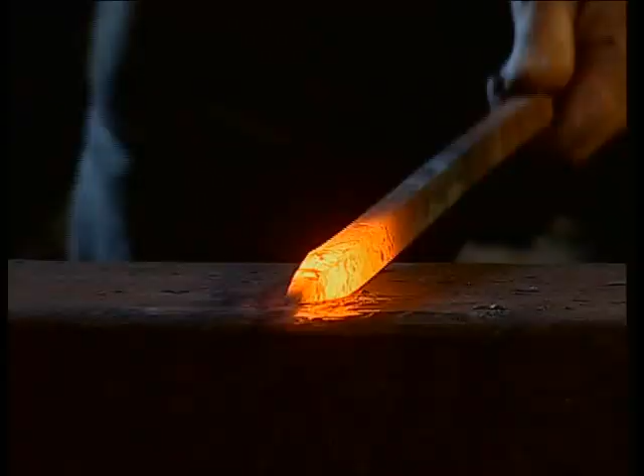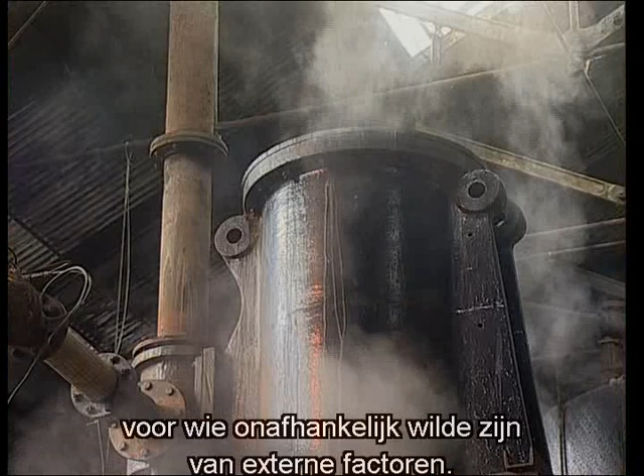For centuries, whenever work had to be done, man was dependent on sheer muscle power. Later, with the help of water wheels and windmills, he was able to utilise the power of the elements, but only to a limited extent. It was not until the early 18th century that a new solution presented itself to those who wished to be independent of the weather and geographical factors. That solution was the steam engine.

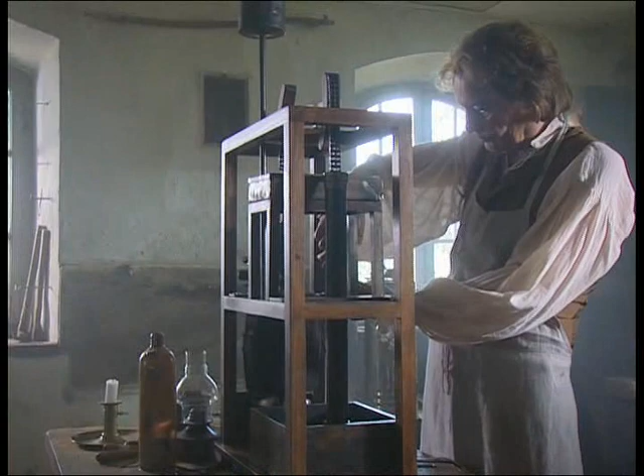One name stands for its success story, that of James Watt. This Scottish engineer didn't invent the steam engine, but he vastly improved the original concept.

In 1775, Watt and his partner, Matthew Boulton, set up a factory in Soho, today a part of Birmingham, which manufactured modern steam engines for delivery to industrial centres all over Europe.

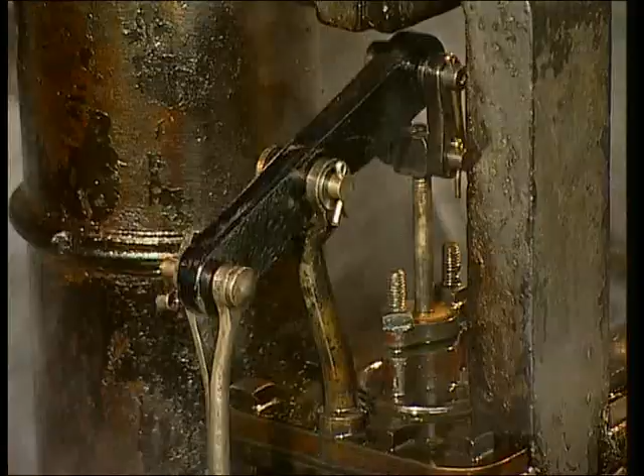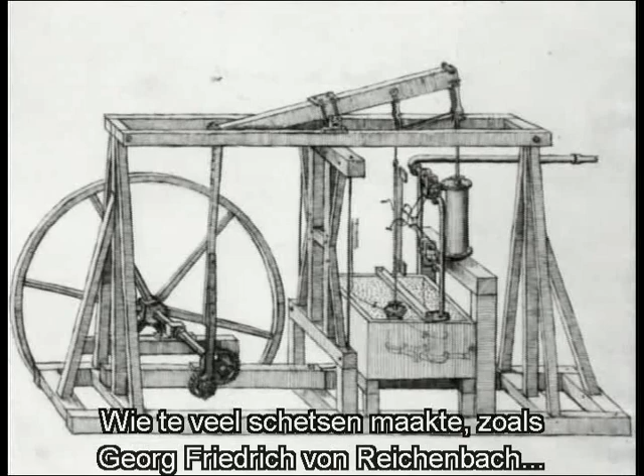Visitors asked Watt himself about all the latest technical developments, but he wouldn't reveal any details. Indeed, he kept his knowledge a closely guarded secret. Any visitor who made too many sketches, like German engineer Georg Friedrich von Reichenbach, was seen as a spy and quickly shown the door. Watt had acquired his expertise at great effort over many years.

James Watt was born in Greenock, near Glasgow, in 1736. His father was a ship's chandler who had his own small workshop. From time to time, he also repaired nautical instruments. James spent a lot of time in his father's workshop, watching him at work.

At the age of 18, he started an apprenticeship as a precision engineer in Glasgow, which he completed in London. James learned how to manufacture scientific instruments, and in doing so, provided proof of his talents.

In 1756, Watt returned to Glasgow. Since the length of his training did not meet the requirements of the craftsmen's guilds, he was not permitted to set up his own workshop.

However, Glasgow University required his services. And in 1757, it allowed him to open up a small instrument-making business on its premises. This was a real stroke of good fortune for Watt, since staff at the university imparted modern technical knowledge and engaged in research.

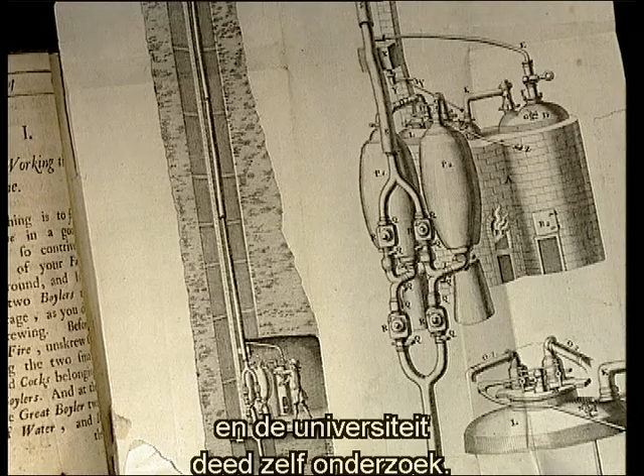Its scientists were particularly interested in the steam engine. It enabled heat to be converted into mechanical energy.

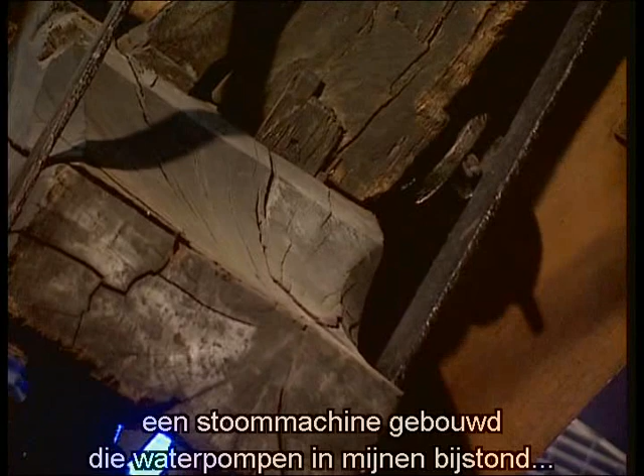In 1712, a blacksmith and inventor called Thomas Newcomen had built a practical steam engine. It was designed to improve the efficiency of water pumps in mines so that galleries could be driven further underground.

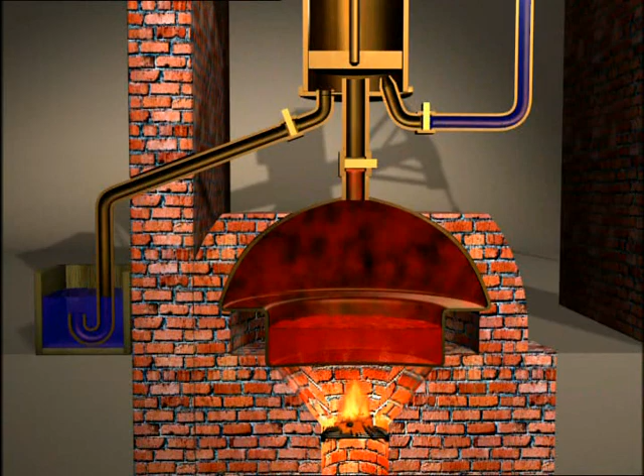With Newcomen's invention, water is made to vaporise in a boiler. The steam is fed into a cylinder. The pressure from the steam and the weight of the pump rods on the other side of the beam slowly force a piston in the cylinder upwards.

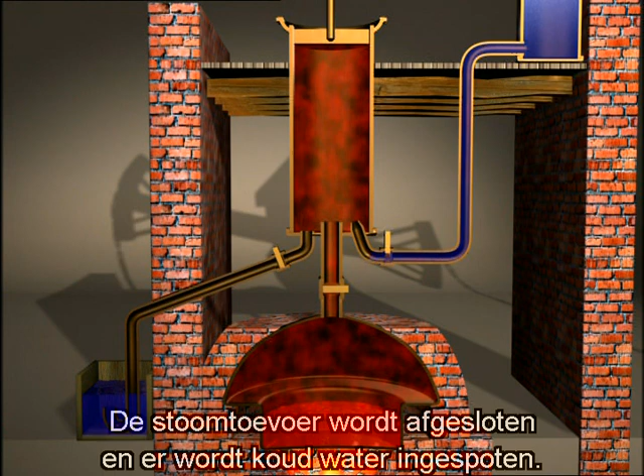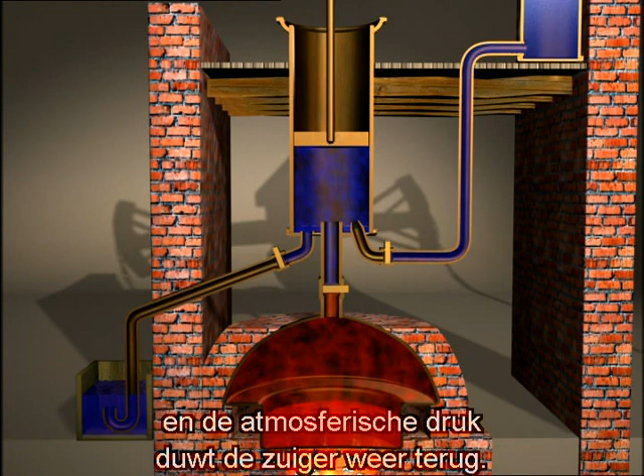The steam supply is now cut off and cold water sprayed into the cylinder. The steam condenses and its volume decreases abruptly. This creates negative pressure in the cylinder and, because of the atmospheric pressure acting from above, the piston moves back down into its original position. The water that is collected in the cylinder is drawn off and the process starts again.

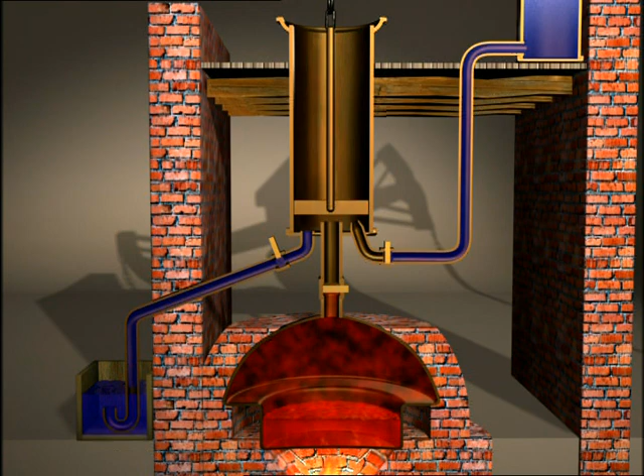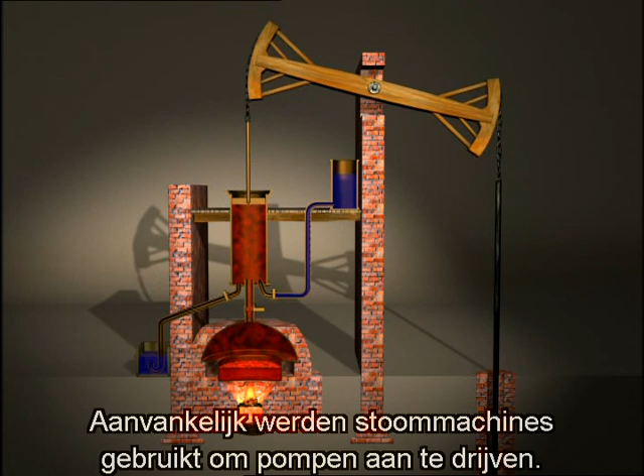For many years, steam engines were used primarily for operating pumps. Newcomen's success was also revealed by the fact that a model of his machine was used at Glasgow University for explaining how steam engines worked.

But the model didn't always function as well as intended. When it came to an unexpected stop yet again, it ended up on Watt's workbench for repair.

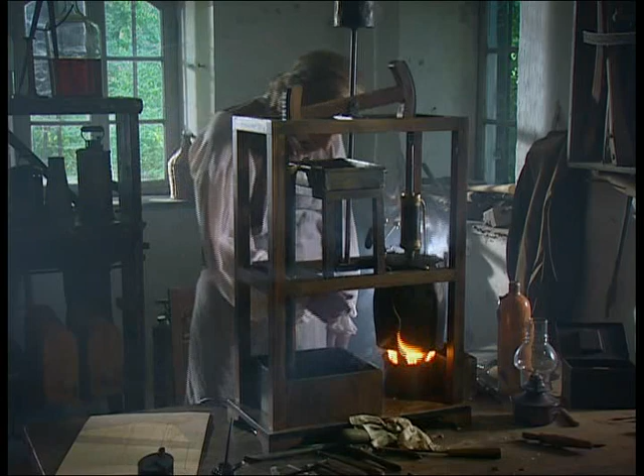James Watt began to examine a machine that was totally new to him. He discovered that the principle was not very economical, because when the cylinder fills with steam, it gets very hot, and when condensation takes place, the cylinder cools down considerably.

With each working cycle, the cylinder first has to be heated up again, so a large amount of the steam supply is wasted.

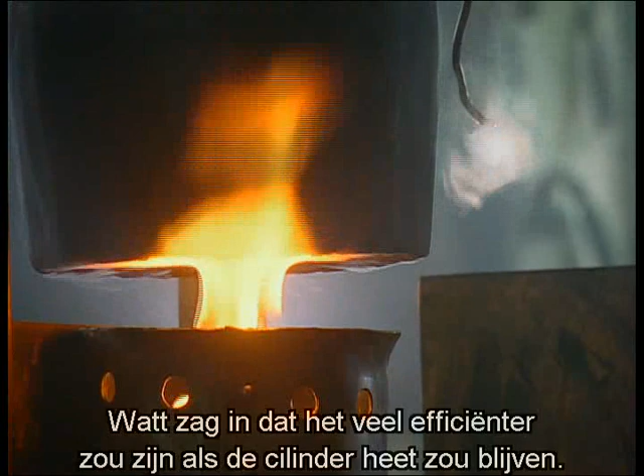Is it really necessary, Watt thought, for the cylinder to cool again? Surely leaving it hot would be much more efficient, but in that case, how could the steam be condensed? Watt then had the brilliant idea of using two separate cylinders.

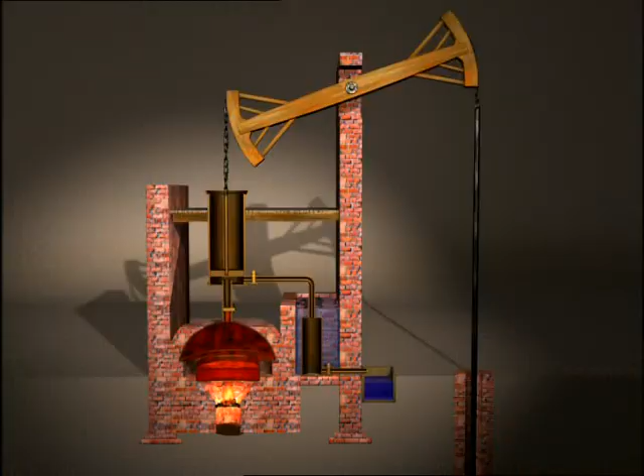At the start of his process, the piston is at the bottom of the cylinder. When steam is introduced under the piston, this subjects it to pressure. As with Newcomen's machine, the pressure from the steam and the weight of the pump rods force the piston upwards.

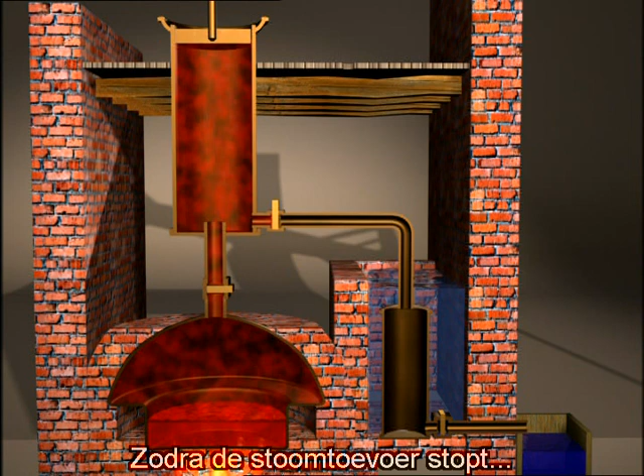Now the steam supply is cut off and a pipe leading into the second cylinder, the condenser, is opened. In this case too, the cooling of the steam creates negative pressure, which, together with the atmospheric pressure, forces the piston back down.

The pipe connecting the cylinder with the condenser is then closed off again and the steam valve opened. The process can now be repeated without the steam cylinder having to cool down.

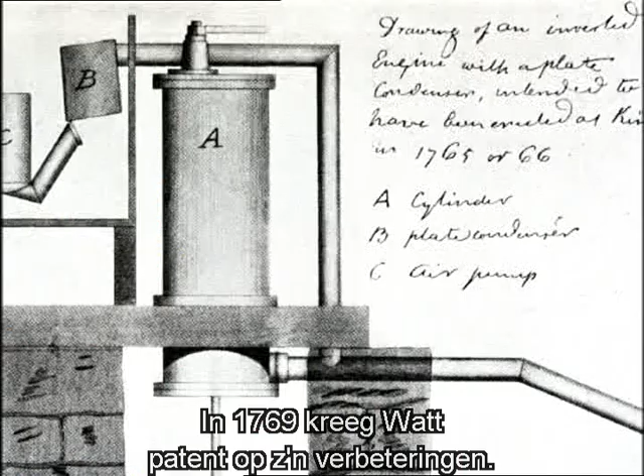In 1769, Watt had his improvements patented, but in order to build a practical steam engine, he needed a lot of money. He found a financier in John Roebuck, a mine owner. In return for his support, Roebuck claimed a 2/3 share in Watt's patent.

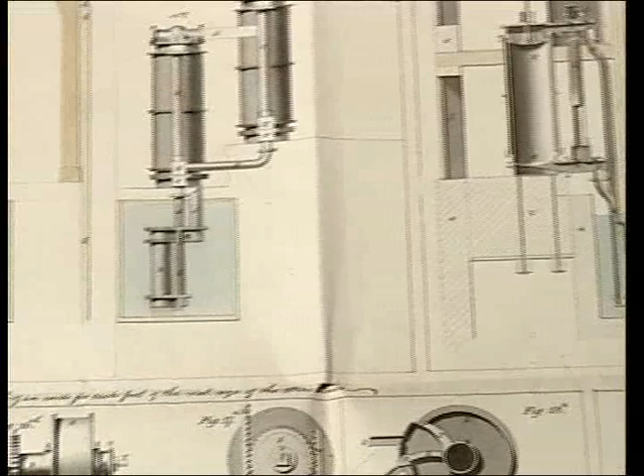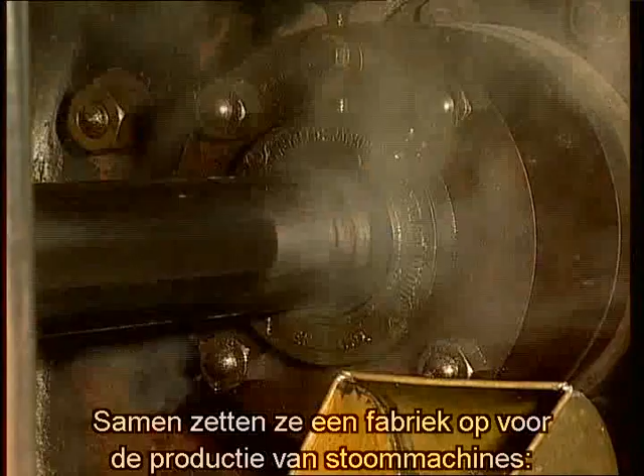But four years later, Roebuck went bankrupt. He sold his patent rights to a wealthy manufacturer from Birmingham, Matthew Boulton. Boulton immediately recognised the importance of Watt's steam engine.

Shortly afterwards, he and Watt founded the world's first factory for manufacturing steam engines, Boulton and Watt. Only a year later, production got underway. Meanwhile, Watt was already working on further improvements. His aim was to boost the efficiency of the steam engine so that it could be used for other tasks beside operating pumps. He achieved this with his double-acting steam engine.

First of all, steam flows into the cylinder and forces the piston downwards. Watt's idea was that when the piston is at the bottom of its stroke, steam pressure could also be used to force it back up.

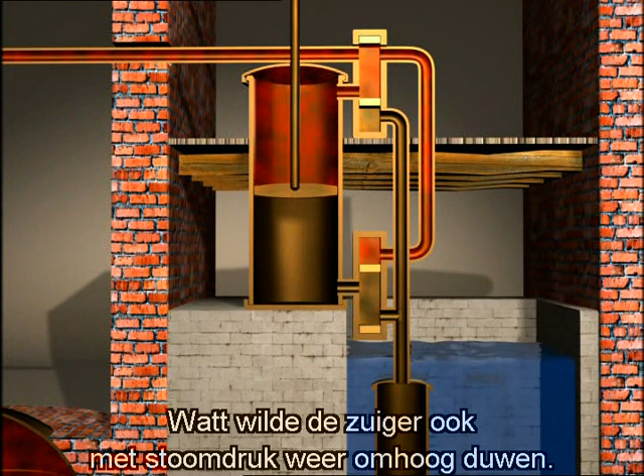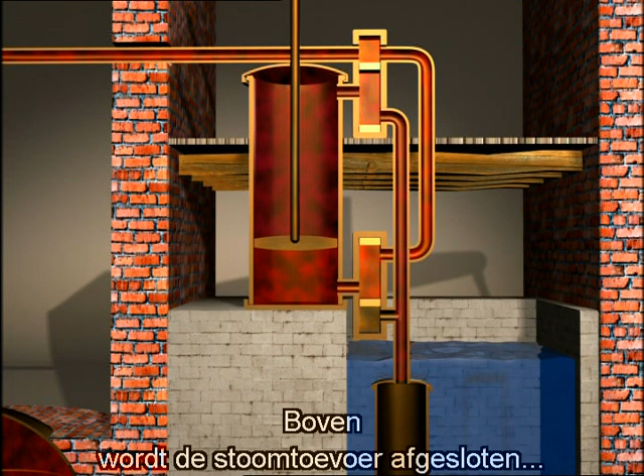To achieve this, the steam supply is cut off at the top and opened up at the bottom of the cylinder. Steam now flows into the cylinder from below and forces the piston back up, and to prevent steam at the top from impeding the upward movement, the steam supply there is cut off and the connection to the condenser opened.

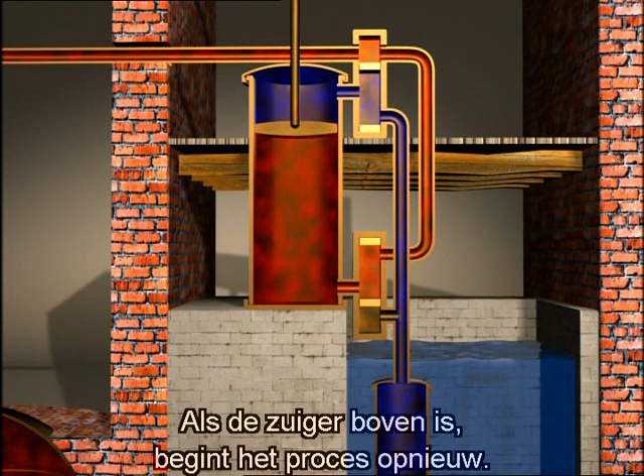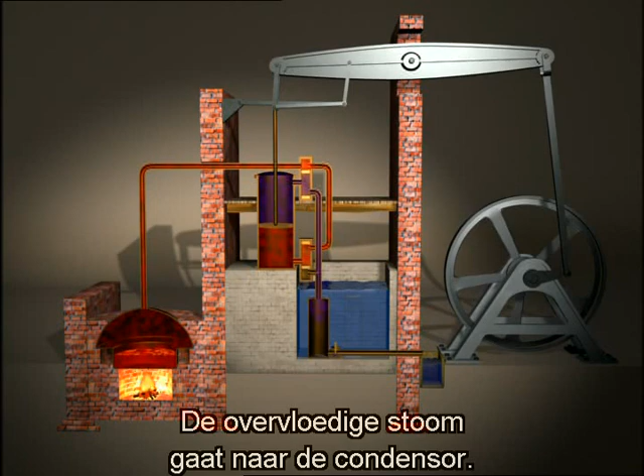When the piston is at the top of its stroke, the process begins again. The steam supply is opened at the top of the cylinder and shut off at the bottom. At the same time, the connection to the condenser for the superfluous steam is opened. With this technique, Watt was able to utilise both piston movements, upwards and downwards, to achieve a vast improvement in efficiency.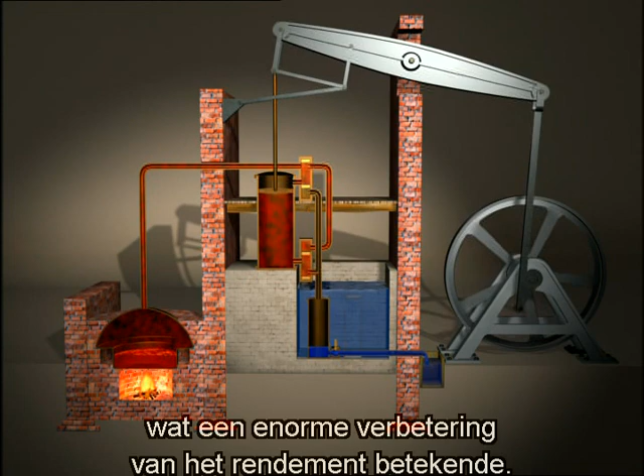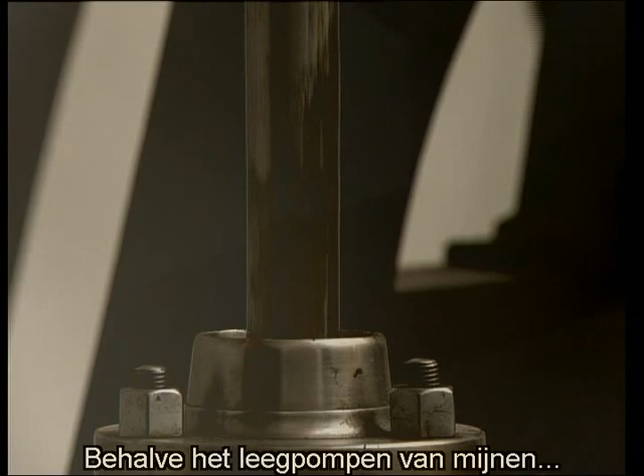The double-acting steam engine was also suitable for converting the up and down motion of the piston into rotary movement. So instead of just pumping water out of mines, the steam engine could also be used to drive other machines as a substitute for wind and water wheels.

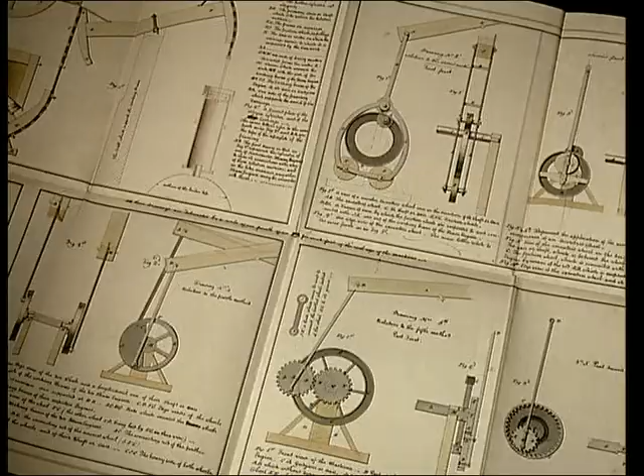To achieve this, Watt invented a special transfer mechanism, a planetary gearing. In addition, uniform rotary movement is attained by means of a large, heavy flywheel.

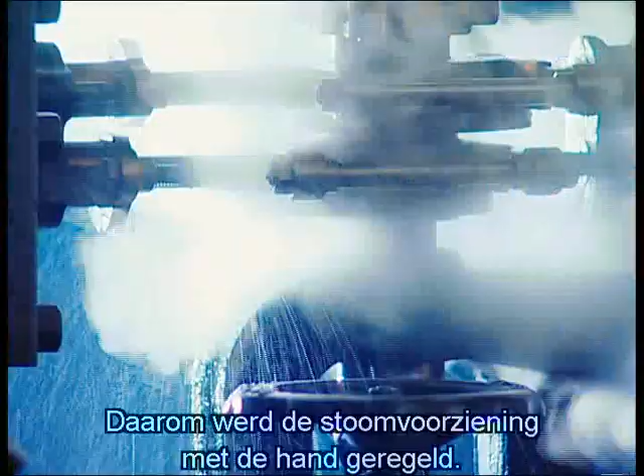But one major problem remained. If several looms in a mill were operated simultaneously, the heavy load caused the speed of the steam engine to fluctuate considerably. To correct this, the steam supply had to be regulated by hand. But in 1788, Watt solved the problem. He developed an automatic speed control, the centrifugal or flyball governor.

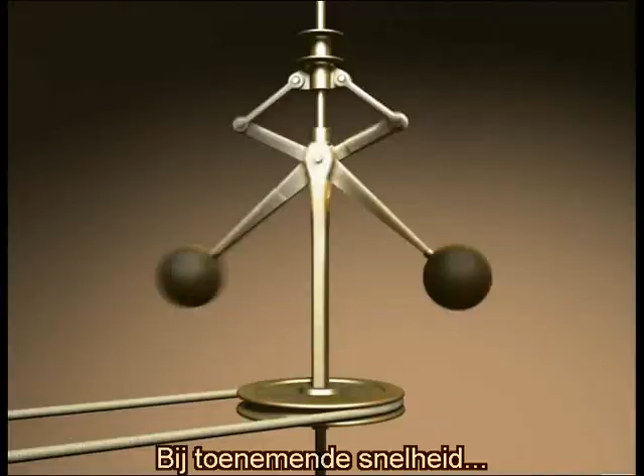If the speed of the steam engine increases, centrifugal force causes two rotating masses to move outwards. This motion is transferred to a throttle valve, which reduces the steam supply from the boiler to the cylinder, so the machine again runs at its original speed. Conversely, if the steam engine is running more slowly than normal, the throttle valve opens to raise its speed. It's an automatic control system.

In order to describe the advantages of his rotary steam engine in a better way, Watt introduced a measure for its output: horsepower. The work done by horses had been used for this purpose at an early date, but Watt made the comparison more precise. In 1782, he calculated the size of a steam engine for a sawmill. He'd obtained data on the performance of the horses used in it from the miller.

On the basis of this, Watt determined that 1 horsepower was the amount of work needed to raise a mass of 75 kilograms 1 metre in 1 second.

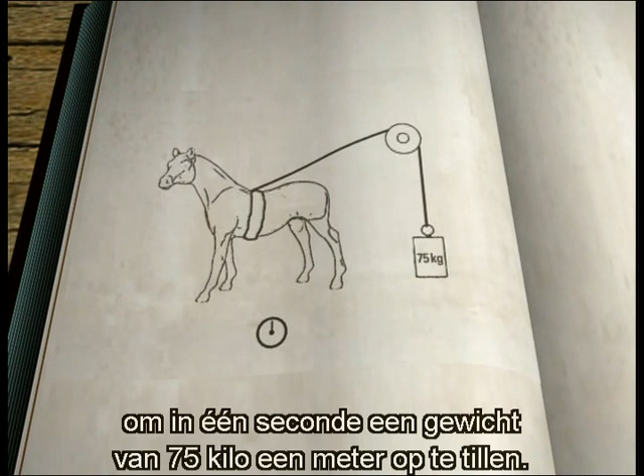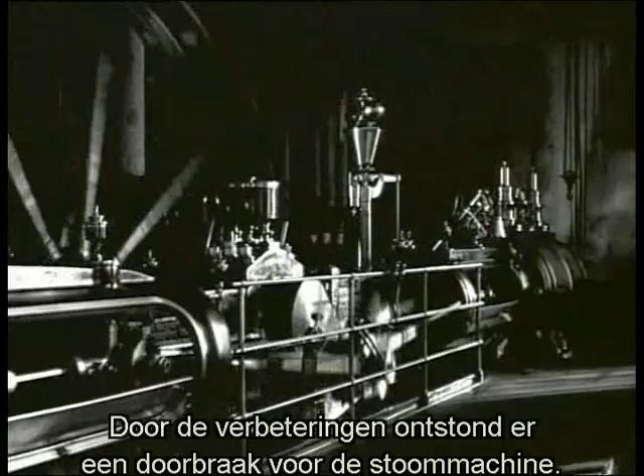Through their improvements, Boulton and Watt enabled the steam engine to achieve a breakthrough. Now, it wasn't just mine operators who wanted the new type of steam engine, but also the owners of paper and cotton mills.

A few years later, James Watt was a wealthy man. Patent revenues to the tune of more than £76,000 swelled his bank account.

And his achievements were soon recognised by Britain's social elite. In 1785, James Watt, a man who had never studied, was made a Fellow of the Venerable Royal Society of London.

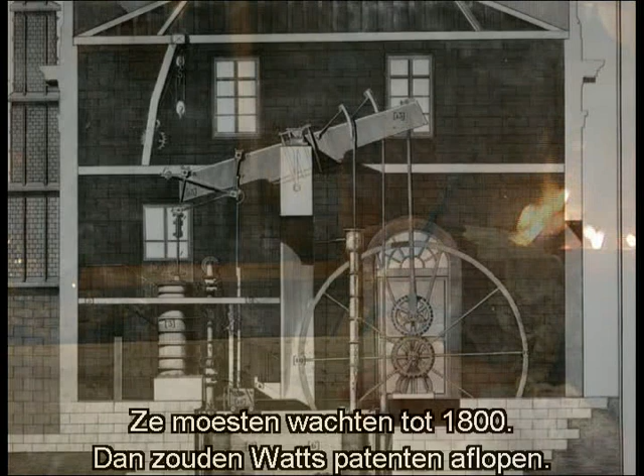Watt's steam engine was successful, but the limits of its performance capacity had not been reached. However, Watt's patent rights prevented other engineers from developing steam engine technology any further. They had to wait until 1800, when his patents expired.

One step which Watt had always declined to take was the use of higher pressure in his steam engines. But this enabled the construction of smaller and even more efficient machines, which opened up new areas of application.

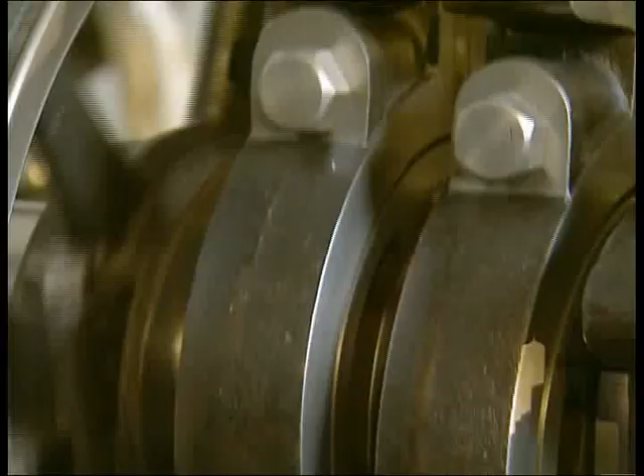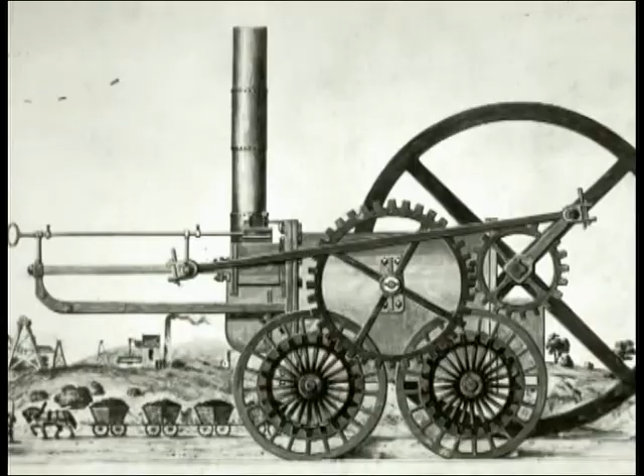In 1804, Richard Trevithick built a steam engine that could travel on rails. George Stephenson used the concept in designing his locomotive, the Rocket, which in 1829 won a speed and endurance contest near Liverpool.

In addition to the railways, it was above all large steamships which used the new engines.

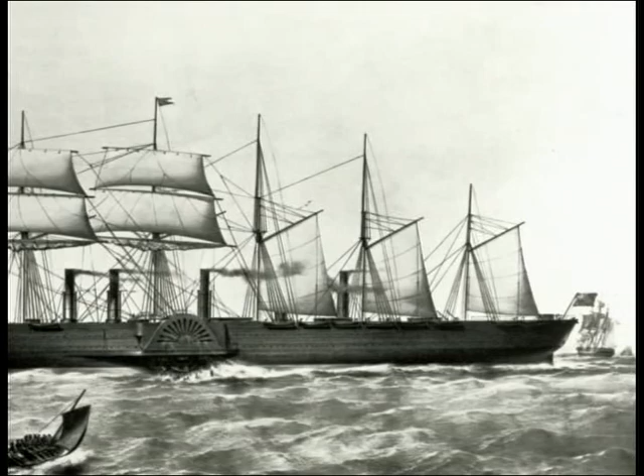James Watt died in Heathfield near Birmingham on August the 25th, 1819. Nearly 200 years on, the man whose developments launched the modern industrial era is still very much present in our everyday lives.

Not only in the horsepower unit which he introduced, but also in the watt and the kilowatt, units which have replaced horsepower as a means, for example, of indicating the output of a car engine.